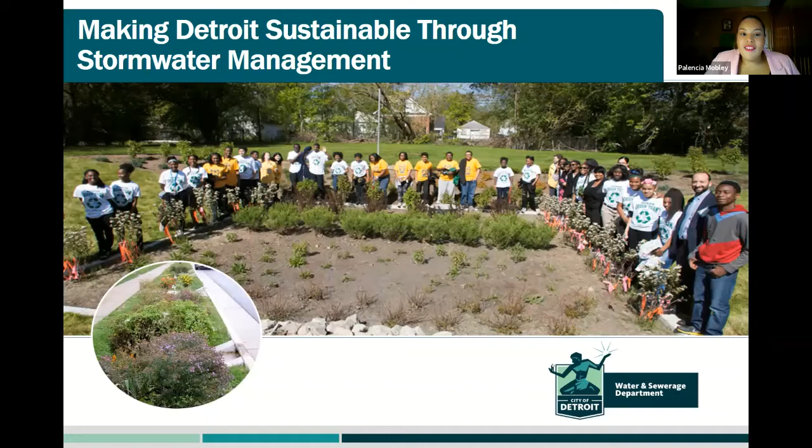Detroit is unique in certain respects in that we never had any sort of ordinance that required us to manage stormwater. So stormwater runoff from parking lots and roofs and driveways just went into the combined sewer system. That obviously led to flooding and untreated CSO discharges to the Detroit and Rouge rivers. The lack of regulation has had some expensive consequences for us.

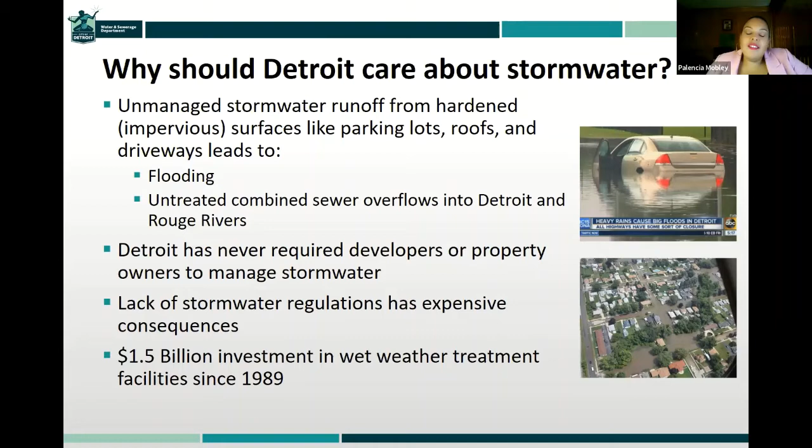Since the late 80s, early 90s, we have invested $1.5 billion in wet weather treatment facilities. I like to say wet weather treatment because everyone doesn't know what a combined sewer overflow facility is. But if I say wet weather, you'll think about rain, you'll think about snow. I say treatment, that makes you think I'm doing something to it. It's not just sitting there. And so I like to use that term a lot.

So this is a picture of the Port Authority in Detroit. You see General Motors headquarters, the Renaissance Center in the background. It looks great, right? Lovely, beautiful day in the Motor City. Well, I was searching for something on the internet and was trying to do a presentation for the mayor to kind of talk through the entire wet weather treatment program. And I landed on this.

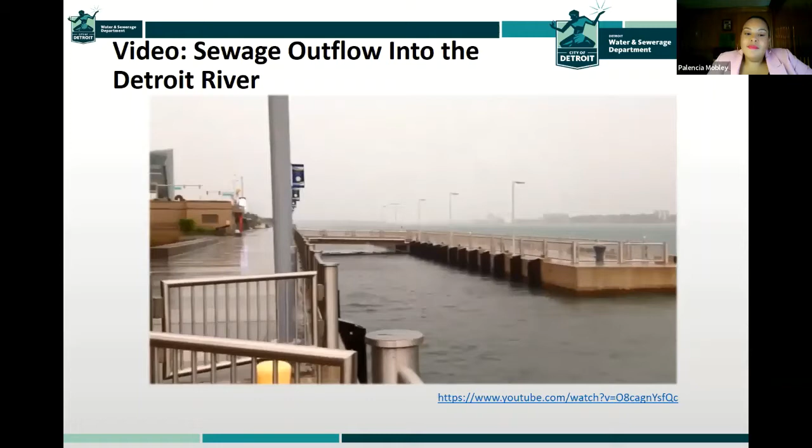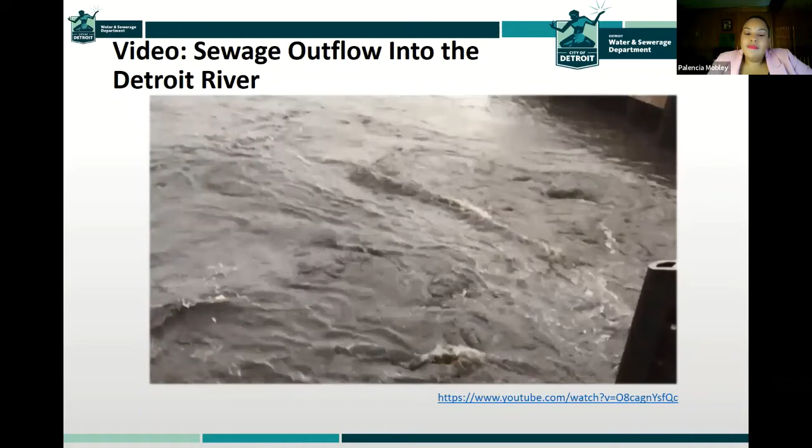And if you have ever had the opportunity to see an untreated sewage discharge, well, consider yourself in luck today. See a little floatable coming out there.

So I always show this video, and I definitely show it a lot to residents because they've never seen this. So imagine just walking downtown in the rain. We have a brand new river walk. Detroit is an industrial city, much like Cleveland and Chicago, where the river really was used to transport goods and materials. So we're just now trying to connect the people with the river and beautify our waterfront. And you're just walking downtown and you see this. You don't really know what it is. You probably think it's an oil spill or something.

But you know, Exxon Mobil or Amoco, not that I'm saying either one of them create an oil spill or anything, they're nowhere in sight. This is not where the Marathon facility is in Detroit. So when you see this, you don't know what it is. And it's a sharp contrast, right? You can clearly see the blue in the horizon of the river, but this murky, dark water kind of pushing out. And residents are usually miffed, right? They can't believe this is happening in their city.

So in the city of Detroit, it's a really busy diagram, but it's just to show where we have all these different facilities. We have 9 wet weather treatment facilities throughout the city of Detroit and some of the near-term suburbs. In the far left-hand corner, you will see a beautiful green area. That is a golf course. There's a CSO facility embedded in a golf course. Actually, it's a TPC golf course in our neighboring city of Dearborn. And I always tell people, infrastructure hides in plain sight.

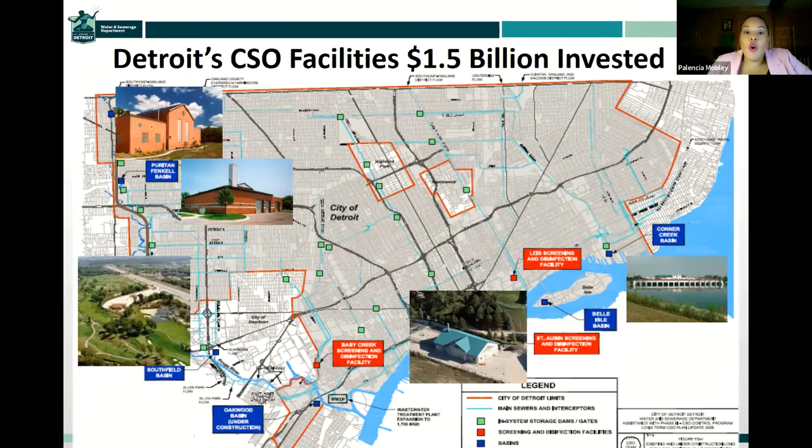The little green dots on the map represent what we call in-system storage gates. The people who designed Detroit's infrastructure and sewer system, I marvel at what they did. They were genius. We have very, very large collector sewers all throughout the city. I'm talking 10-foot, 14-foot diameter sewers. And Detroit is exceptionally flat. So those sewers behave as storage. These green dots are in-system storage gates that are activated depending on what type of storm we have, and they're used to hold the flow to prevent untreated discharges from occurring.

So I show this to folks a lot. This is a picture of what's now known as the Aretha Franklin Amphitheater. And I always ask them, what do they think the building is with the blue roof? Do they think that's where all the acts that perform at this amphitheater stay? Is that the office or the backstage area? And they're all like, yeah, sure. And I said, actually, it's a wet weather treatment facility.

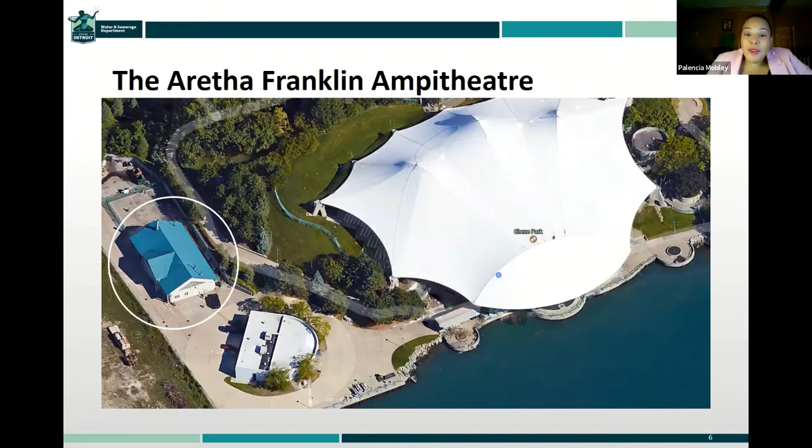So I like being able to connect people to the things that actually make their life better. This is a quality of life improvement that you don't know is there. You assume it's part of the amphitheater. And I'll be honest, before I did what I do, I thought that's what it was too, when I was a teenager.

So Detroit is extremely unique. We've done all this investment in wet weather treatment, and we've been able to pretty much eliminate 95% to 98% of our untreated CSO discharges. But how do you get rid of the remaining 5% or so?

Detroit's population, this is from 2010, we had 933,000 people over a 139 square mile area. You can fit San Francisco, Boston, and Manhattan in Detroit and still have 21 square miles left over. And they have 2.8 million people. Well, we don't know what they're going to have post-pandemic, because I have some new neighbors from California down the street that actually came from San Francisco.

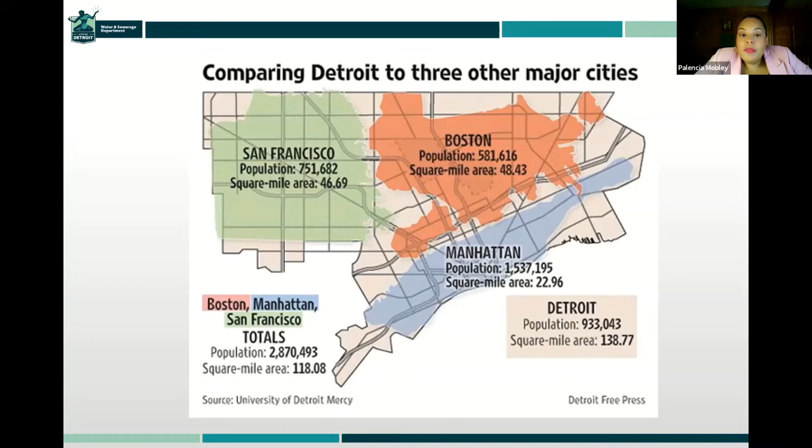So we've used a multifaceted approach here to manage stormwater. We had a permit obligation to develop a post-construction stormwater ordinance, and so we started that process. We also already had a wet weather treatment program. And so we have a drainage charge in the city of Detroit, much like Seattle and Portland have, and Philadelphia at this point, where we charge for stormwater runoff based on the amount of impervious acres on your property.

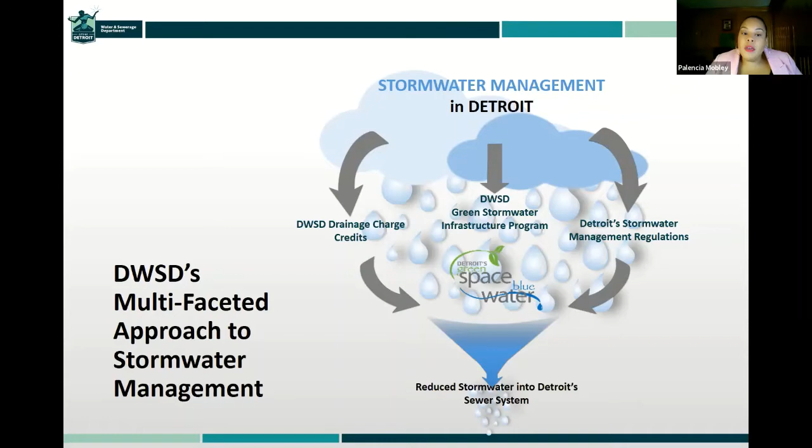And if I don't have any water nerds in the building, impervious acres are just the hard surfaces that if you pour water onto concrete, the concrete is not going to soak it up, it's going to run off. So that's what we mean by impervious surfaces. And then we have our green infrastructure program that's regulated by our permit. So when we put all those things together, we now have a systematic approach for reducing stormwater entering the combined sewer system in Detroit. So I'm going to go through each of these elements.

So our green infrastructure program is a $50 million program that is primarily concentrated on the northwest side of Detroit, the west side of the city, formerly known as the Upper Rouge tributary. In 2008, the city of Detroit was supposed to put in a $1 billion storage tunnel. We'd already committed to $1 billion and some change of other improvements. And it was determined that it was just not financially feasible for us to do this.

So in negotiating with the regulators, we were able to say, well, you know what, we have land. Why don't you allow us to try to manage stormwater before it ever hits the combined sewer system? And that is where the green infrastructure program was born. We have an interdepartmental working group in the city of Detroit that includes our planning department, our parks department, our Department of Public Works, in which we all talk about the projects that are going on and what elements of stormwater management can be incorporated into those projects.

We have a high level of community outreach. As a native Detroiter, I can say unequivocally, without a doubt, the amount of engagement that happens now, not just from the water department but the city at large, is more than I've ever seen in my lifetime.

I'm very honest about when I bought my house almost 20 years ago. I remember getting a letter in the mail saying my water main was being changed, but that was it. There was no conversation about it. I didn't really know what day they were coming. I remember being a little upset because I couldn't get in my driveway.

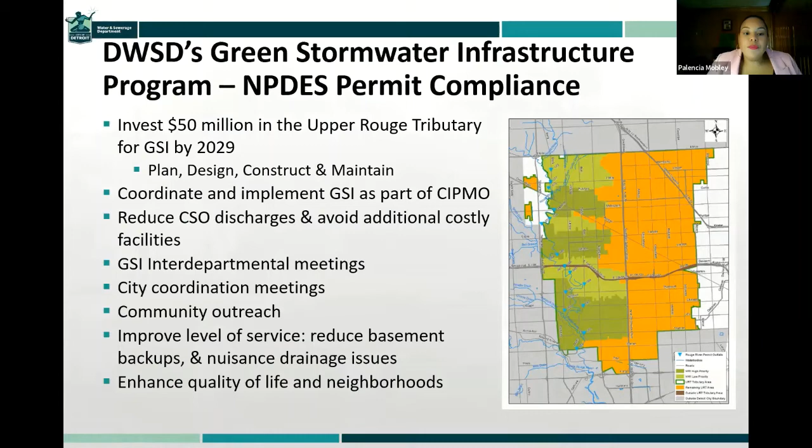And we started the program with these vacant lot projects. So we have a land bank. Many cities have a land bank or a land trust or something of that nature. Under our land bank, all the vacant parcels in the city were in the land bank, almost 100,000 parcels.

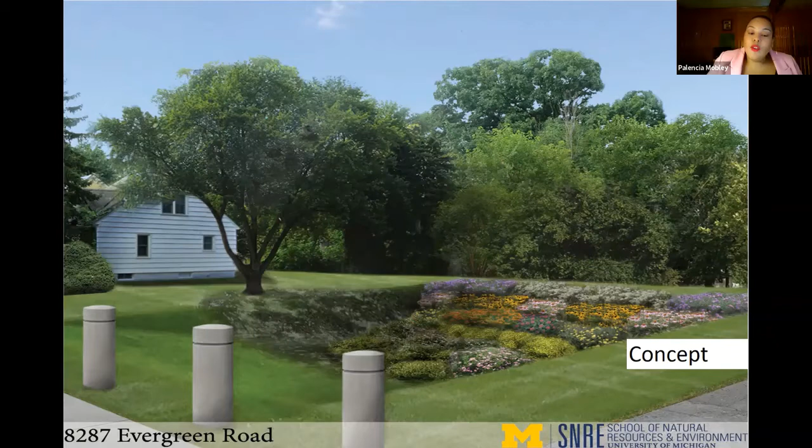And so we began to try to figure out where we could install green infrastructure. The University of Michigan students began looking at these concepts and presented them to us. A partnership between the University of Michigan, DWSD, and some of the foundations yielded a real life green infrastructure project.

So we put in 4 of these. These were our first stormwater management projects. They managed close to 1 million gallons of stormwater annually. They cost a lot of money, ending up around $800,000 for a variety of reasons. They're situated on 2 vacant lots.

We went back and retrofitted them. 2 of them that aren't on main thoroughfares now have trench drains that connect the flow from across the street into the parcels. So we had to try some stuff.

We also tried porous asphalt. Just so you know, I'm redoing this now, okay? We tried it, didn't work out. We gotta try something else.

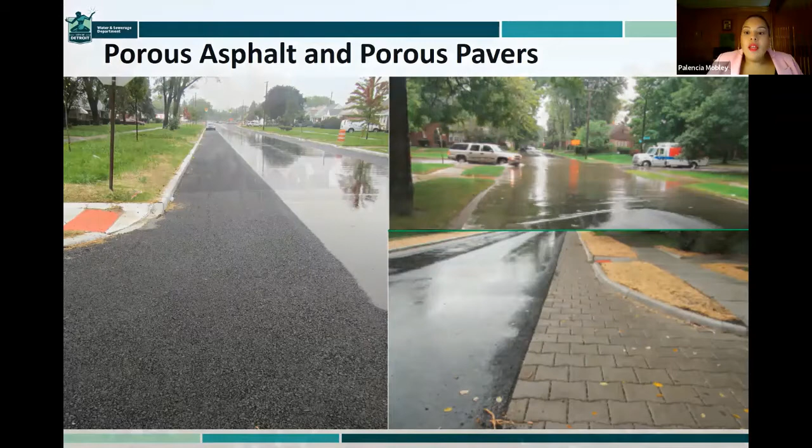This is probably one of my favorite projects, and I won't get too political right here. Chelsea, you'll have to let me know when I'm going over because I don't really time myself.

This was a park. Now you see it looks like a big grassy field, but this was a park. It had no play equipment, and it was named after Viola Liuzzo. She lost her life in 1965 when she marched on Selma to help register Black voters in Selma, Alabama, and she was killed by the Ku Klux Klan. The neighbors for some time wanted to honor her and didn't really know how they were going to be able to do that.

So in a partnership with the UAW and the city's parks department, they fundraised, and this is what we have now. We have a walking trail in the park, picnic tables, and - I'm going to mess up the name of it - pickleball courts. This park is not far from my house; it's literally 5 minutes up the street.

We put in 3 bioretention areas in the park. We invested about $400,000—actually a little more, about $500,000—in the bioretention we put in this park. We also put in trench drains so we could handle all the flow from the surrounding streets. For me, it really represents everything that she fought for and what she lost her life for.

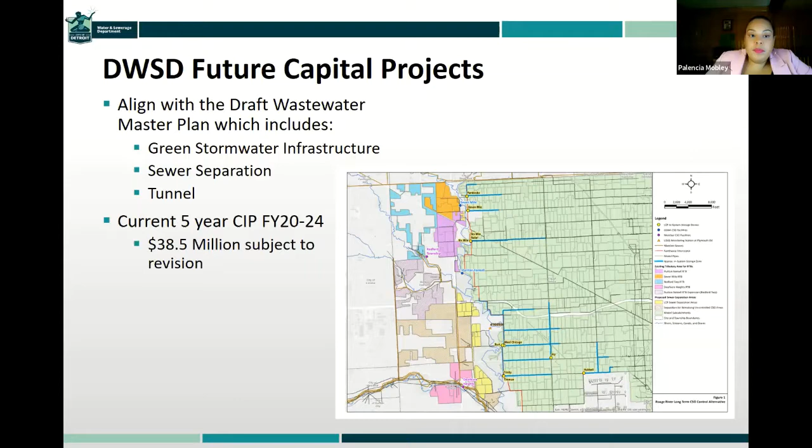So, our drainage charge program—I won't belabor this because we're under litigation. It's currently at the state Supreme Court, and we're waiting on the results. They actually had oral arguments a couple weeks ago. But our drainage charge is just based on the amount of imperviousness on a property.

It's been an interesting run because we had to go through a complete conversion of the previous rate structure. We had to tell the parking lots, 'I know you've never seen a water bill, but when it rains, your parking lot isn't a pond, it's not a lake, it's a parking lot, and you're actually still able to use it, so you are receiving a service from the City of Detroit Water and Sewerage Department.' We phased in the rate for those who had not previously been charged, while bringing the rate down for those who had been charged on the impervious acre basis.

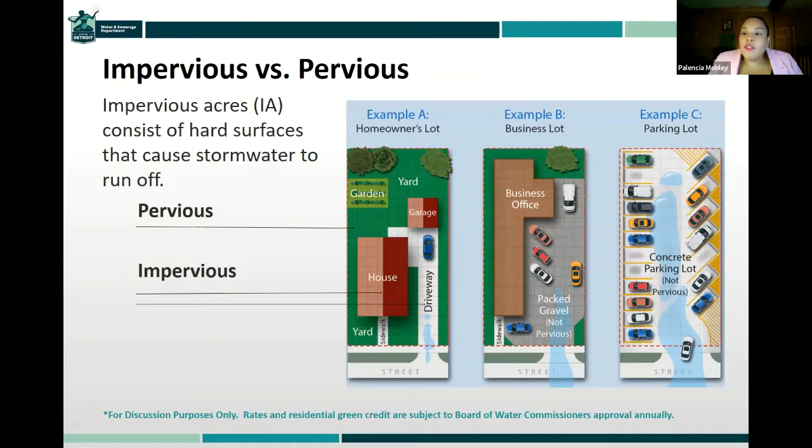In doing this, we had to develop a credit system because we also want people to retrofit their properties and manage stormwater on site. We believe the more water we can have managed where it falls, the more it reduces the overall burden on the system during wet weather, and it will also allow us to potentially reduce future investments in the combined sewer overflow program. Those of you who are practitioners know that to get to that last 5%, the return on investment isn't there—it's very cost prohibitive to try to do that remaining 5% with some of the gray controls.

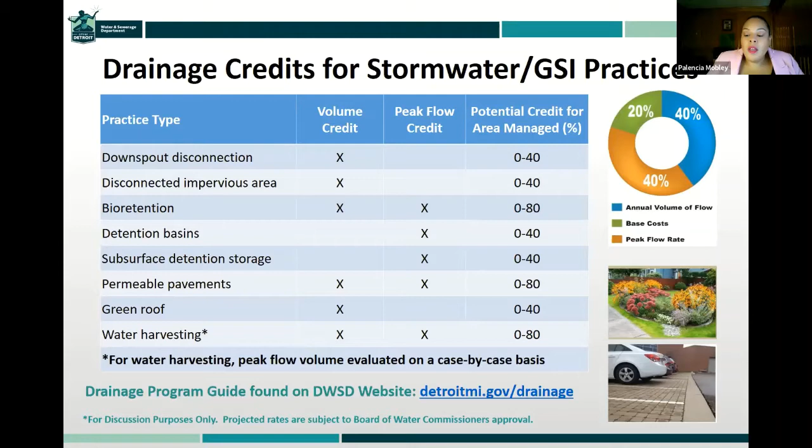So GM Poletown, which was the plant they said they were closing, is now being completely retrofitted to build the electric Hummer that's coming out. My little favorite project is no longer my favorite because it may not exist like this in the future. It might be slightly different, but they were able to recoup their investment in a year and some change.

GM figured out how to manage their entire 365 acre site. They were paying us about $180,000 to $200,000 a month for drainage. So they put in 3 stormwater retention ponds, managing 220 million gallons of water a year, reusing some of that water for their powerhouse operations. They saved 20% on their potable water usage, so they weren't buying as much water from us, and likewise they reduced their drainage charge.

So it's the gift and the curse. It's the gift that keeps on giving in some respects, because the long-term ROI is what you hope to see in terms of reducing future investments.

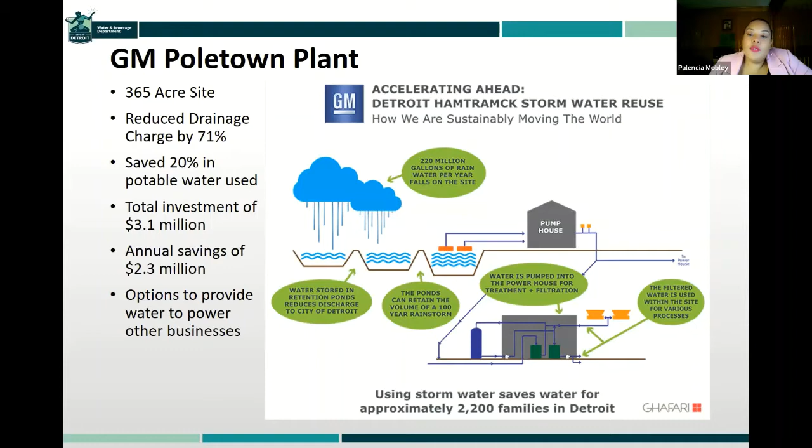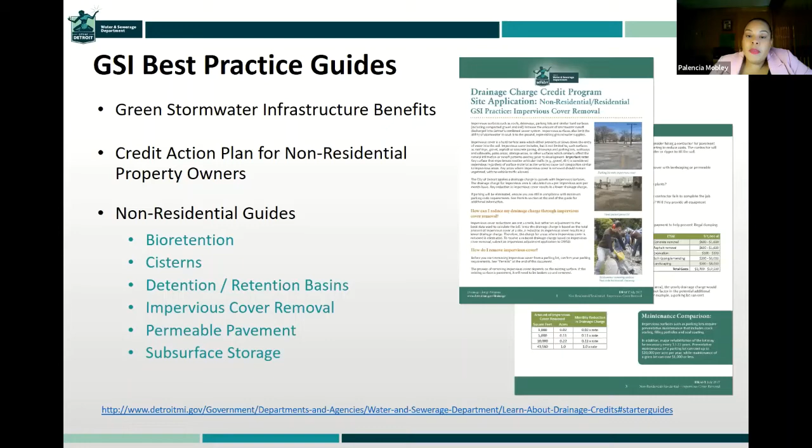We also developed best practice guides. We wanted our customers to have all the information they needed to make the best decision for their particular property. So we allow a variety of different things, from bioretention to cisterns to subsurface storage to permeable pavements, to reduce your drainage charge.

We do a lot of customer service. When we rolled this program out, we had to do a lot of what were called impervious area adjustments. The technology might have picked up a pool, and we decided that pools weren't going to be included in imperviousness, because customers are already paying a charge on the potable side when they fill their pool, and they pay a sewer charge associated with that.

We do site visits and we inspect properties, do community meetings. Just the whole gamut is what we've been doing to outreach to our customers.

And of course, we needed help. I will be very honest, when I started in my role, there was me doing all of this plus my other role. Now I have a team of about 8 people plus some consultants who manage our entire stormwater program.

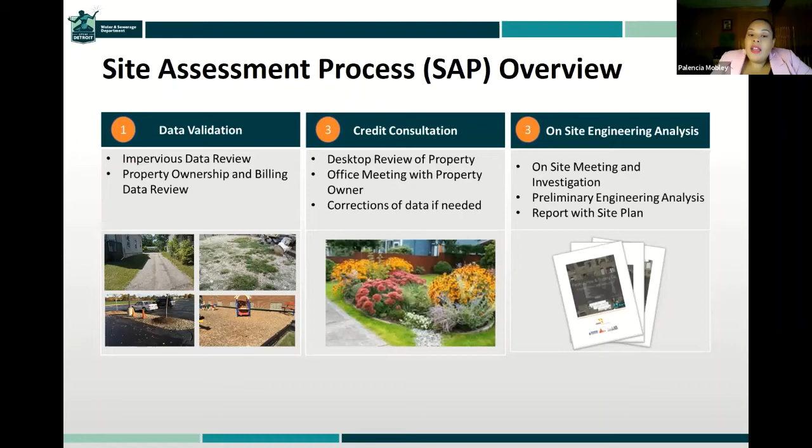So for our industrial and commercial customers, or like we like to say now, non-residential customers, we create a site assessment process so they can understand what they could potentially do on their property, and we give them a low, medium, and high intervention option. They make decisions about whether or not they want to install green infrastructure and receive a credit on their bill. We validate all their data, go out, talk to them, and then develop a report.

As part of the program, we've completed over 195 site assessments. Almost half of those have been for our faith-based and industrial customers, and half of those have been commercial customers. And each property is different.

Those of you who do green infrastructure know it's site specific. On the west side of Detroit, we found that we have really good soil—it's not all clay. We have some sand seams that may allow for natural infiltration, as long as it wasn't a gas station or some other use prior to the current one. This has been very helpful for our customers.

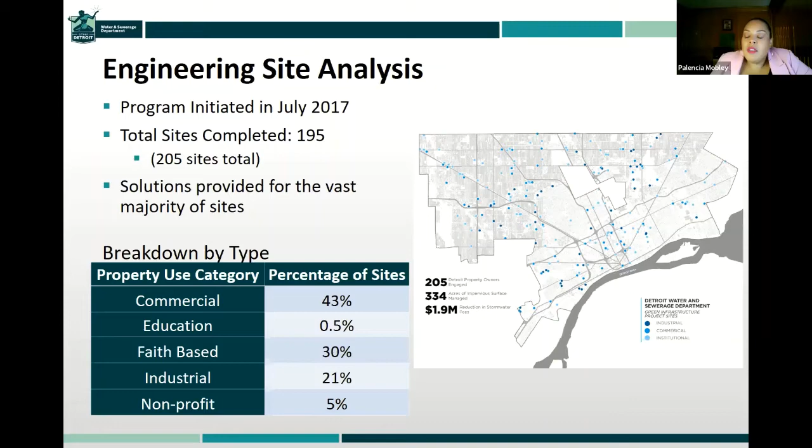And we spent about $1 million. We've been able to help customers reduce their drainage fees by about $2 million for those who have participated and decided to implement some form of stormwater management.

We also implemented a capital partnership program. We are in the process of revamping this—it's on hold right now with the pandemic and changes to revenues. But the initial thought was, if we put something on it, then they can put something on it, up to $50,000. So if a project was $100,000, you could be awarded up to $50,000 to install your project. This has not been the most successful because a lot of the customers don't have the upfront capital.

So we've been looking at ways in which maybe we will have a quality-based selection in which we pick projects and then we fund the project from design through construction. But that's still a conversation piece, it's not set in stone, but it's what many of our contemporaries are doing, including Philadelphia and New York. Everyone ended up there, and those are places where you have a much stronger economic base than the city of Detroit. To do development deals in Detroit, you need several stacks of financing, capital financing, to make it work. And here's the thing, the skyscraper pretty much costs the same in Detroit to build as it does in Chicago or New York.

But the financing mechanism from the private market is just not there. We don't have the solidness and the liquidity in our private financial markets to support it.

So through this particular program, we've awarded 23 applicants with green infrastructure capital partnership program dollars. I think it's actually 25 now, because this is from March. I didn't update my presentation, I'm being honest. And we've approved about 1.3 and some change million dollars for projects.

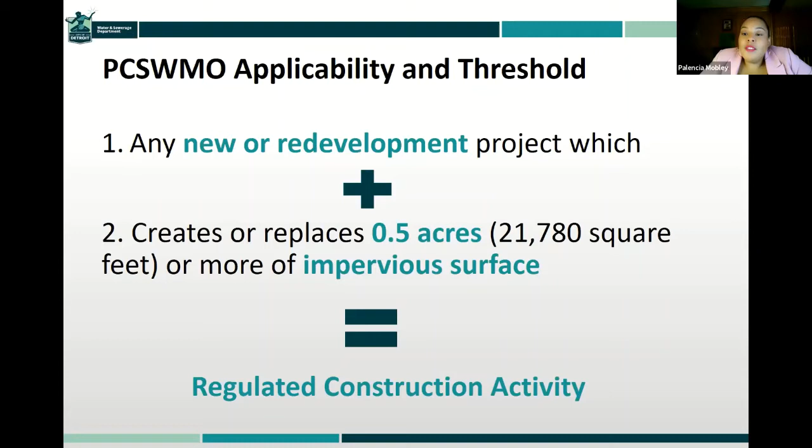Now to the thing that took a lot of time out of my life because there was no team: our post-construction stormwater ordinance. Very simple. Any new or redevelopment project, and pretty much every site in Detroit is going to be redeveloped because it has had something on it previously, that creates or replaces a half acre or more of impervious surface is determined as a regulated construction activity. That means it's subject to the post-construction stormwater ordinance. As part of being subject to the ordinance, you must have some form of detention and retention, and it depends on your site and how large your site is.

What we have found is we needed to do some tweaks. We already had alternative compliance in our ordinance, but it was a little challenging for us to offer it to various customers. So for alternative compliance, you have to have extraordinarily difficult site conditions. Obviously in any industrial city, you will have places where water cannot be infiltrated, and the cost to actually remediate and remove soils and bring in new soils is cost prohibitive in a lot of cases.

So we give two options for alternative compliance. What we call off-site mitigation, where they're allowed to construct something elsewhere in land on the city with equivalent or greater impervious surface that will manage the stormwater practice. This is ideal because you may have a church or some other large commercial customer that really would like to reduce their drainage charge, but they're not able to because they don't have the funding to do a project. So this allows that to happen.

And then they can pay us a fee in lieu. And the fee in lieu is kind of expensive, I believe it's around $8 a gallon. So whatever your site is technically supposed to manage by the ordinance, if you don't do that, you have to pay us a fee in lieu. And then you also pay us a drainage charge when you go live.

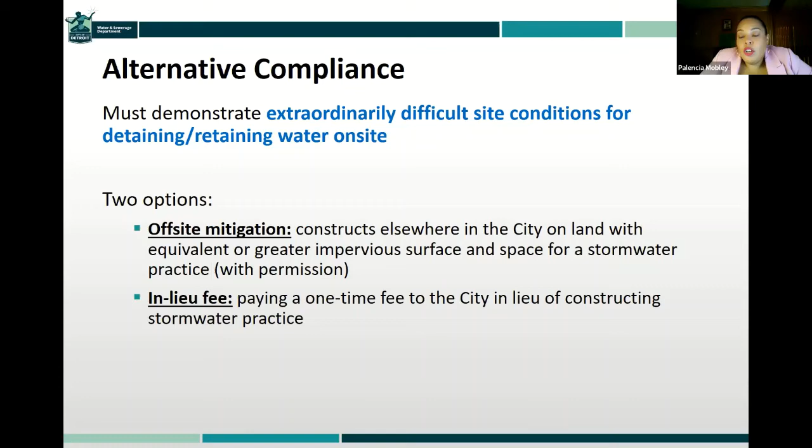As everyone knows, partnerships are what make green infrastructure work. It does not work unless everybody is at the table. And so we've been very fortunate in Detroit.

I remember when I was working kind of liaising between the mayor's office and the department because we had a divorce. Many of you know the city of Detroit went through bankruptcy, and as part of that bankruptcy, a new regional entity was formed called the Great Lakes Water Authority. So basically, they lease the city of Detroit's water and wastewater treatment plants and operate them on behalf of the city and the region. And the city of Detroit receives $50 million, DWSD does, to implement our capital improvement program.

So I remember being in a meeting with the person at the time who was running the program, and we were waiting on Maurice Cox, actually, who's now the planning director of Chicago. And I said, well, wouldn't it be nice if there was just one place where someone could go and see all of the projects that people are doing to manage stormwater? And the person who was managing the program at the time said, the city's never going to have a website for that. They're never going to invest in that.

Well, I'd like to present to you the Detroit Stormwater Hub. We did invest in it. We do have a process by which people can upload their projects and we review them and post them, right, making sure the information is correct.

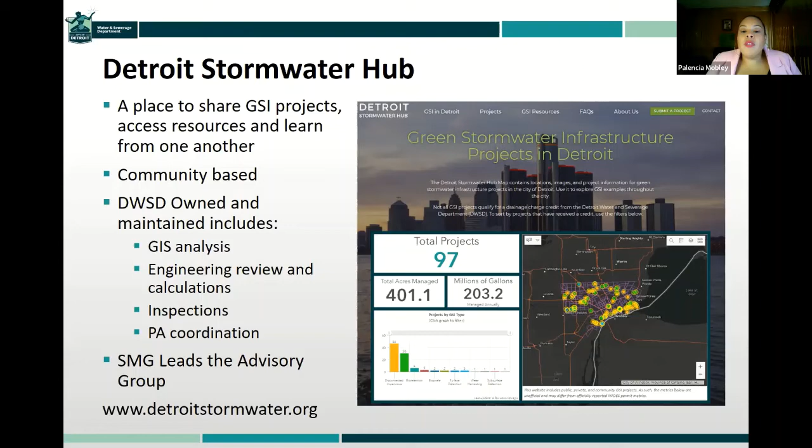The number is probably more than 97 now. I think it was up to 100 and some change the last time I looked at it. But this for me just felt like a culmination of so many different people's efforts collectively placed for everyone to see. And it was a lot of people.

The Erb Family Foundation has been a hallmark and a steward for us, and just a strong partner when it comes to implementing these programs. The Detroit Economic Growth Corporation, which is the city's quasi-public development arm, the Nature Conservancy, the Greening of Detroit - they do a lot of tree planting, as well as they have a program for workforce development for green infrastructure.

Detroit Future City, which is a policy think tank, actually has a really good report out on home ownership versus renting in the city of Detroit and what has happened with home ownership in the city over the years.

Keep Growing Detroit, where you can sign up and get some planter vegetables. And if anybody is like me, this was the first year you had your own food garden, and you were able to harvest your own vegetables in the pandemic.

And then we have DCDC, the Detroit Collaborative Design Center. We have a couple of other projects going on where there's a stormwater management network being led by TNC, and that's in the city's Eastern Market. Eastern Market is our food distribution hub in the city of Detroit, and I think it's one of the oldest, or is the oldest, public outdoor market in the country.

And then other conservancies we engage with are the Detroit Riverfront Conservancy, which constructed the beautiful Riverwalk, and then Friends of the Rouge on the west side of the city.

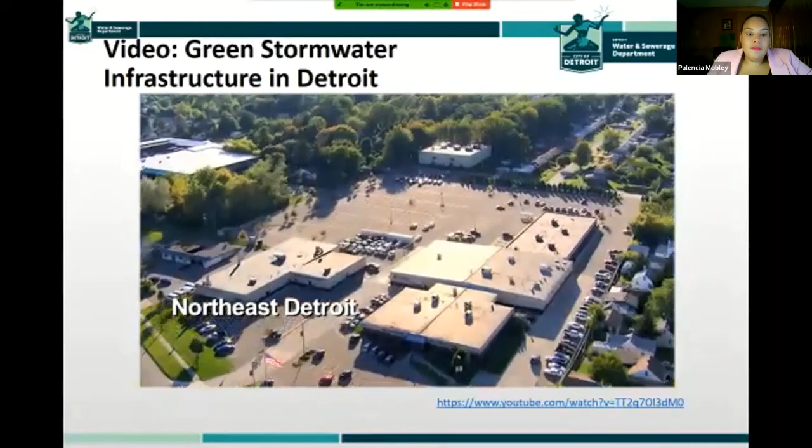Surrounded by 20% of the world's surface freshwater, inhabiting 139 square miles of land, Detroit has an unprecedented amount of open urban space, and it is our duty to protect these precious resources. An urban leader in CSOs for more than 20 years, we've been investing over $1.5 billion in wet weather management, and now we're working to become the front runner in green stormwater infrastructure. Every day, residents, city leaders, nonprofits, and the business community are innovating solutions to prevent untreated sewage discharge. We are applying our Motor City grit to create a sustainable and healthy city through green stormwater infrastructure.

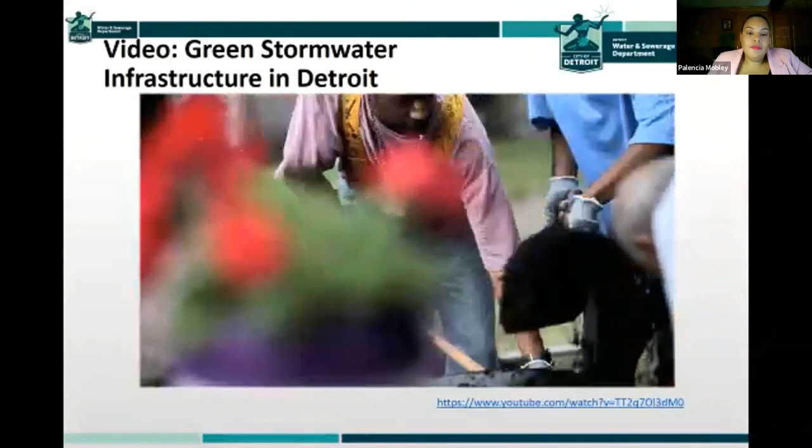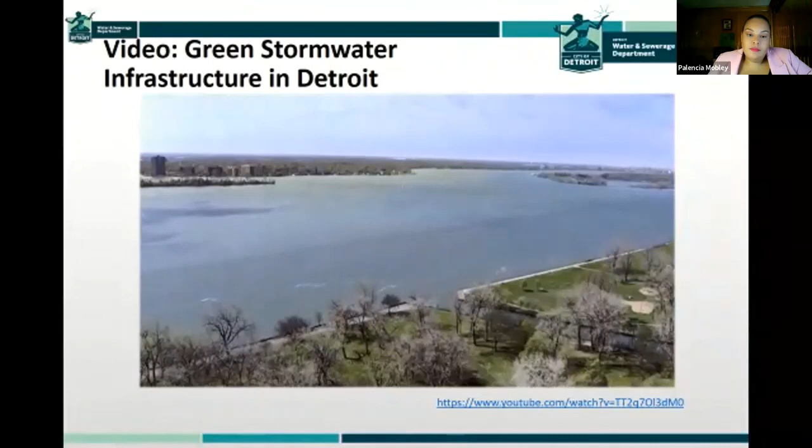With community and collaboration, we're managing thousands of acres of land and billions of gallons of stormwater. We're bringing together neighbors, improving water quality, and making Detroit more beautiful. Our city, known for the automobile, is on the road to becoming the greenest city in America. Welcome to Detroit.